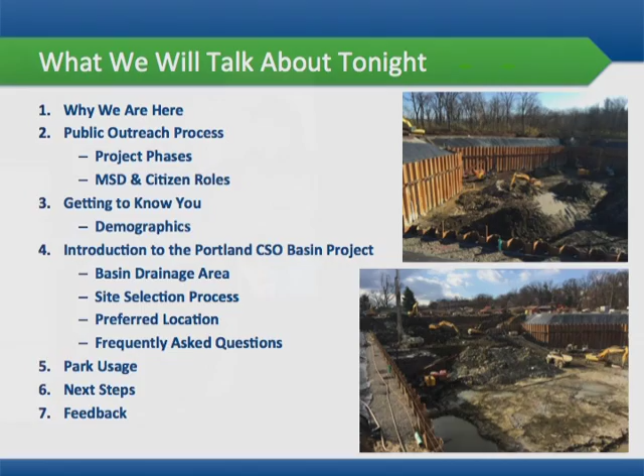You're here for a meeting called the Portland CSO Basin. Well, what is a CSO? If you look at this map, all those dots represent overflows in the combined or the separate sewer system. On dry weather days, sewage stays in the pipe system as it's supposed to and gets to one of the treatment plants in our metro area.

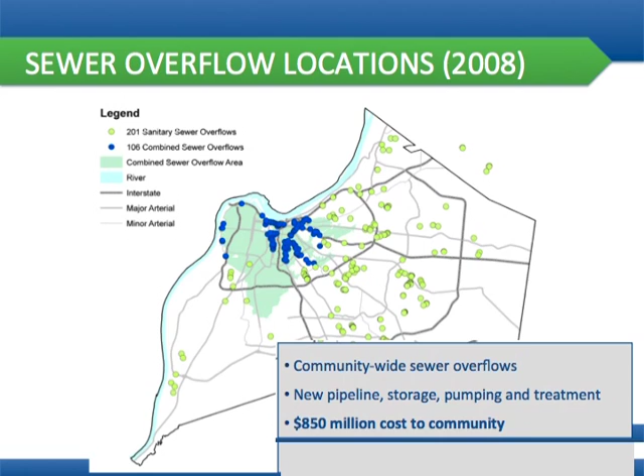However, when it rains, as we say at all of our conceptual meetings, with as little as one tenth of an inch of rain, we can have overflows in the system. The rain gets into the sewer system, and the sewage is not totally contained within the pipe system. It can't handle the rain and the sewage flow. So these show that these overflows are throughout the county.

We are mitigating this problem, we're addressing this problem. You've heard of the consent decree. It's an $850 million cost to the community, so we need to spend these dollars wisely and efficiently, and that's what we're going to explain tonight about this particular basin.

All you really need to take away from this slide is that all of the dots represent CSOs in the combined sewer area. That just means areas basically inside of Watterson where the sewer carries sewage during dry weather, and can carry storm water and sewage during wet weather.

So all those dots represent areas where water leaves the system. With as little as one tenth of an inch of rain, water can leave the system and not make it to the plant, but instead gets to a body of water, Beargrass Creek, the Ohio River.

Let's talk for a second about MSD's outreach program. We have a four-stage public outreach program, a public meeting process, starting with an orientation meeting where we first talk about the consent decree — why we're doing these projects, what the impetus is. We talk about the background of when the consent decree began, what problems we're trying to solve, and what we can do as individuals.

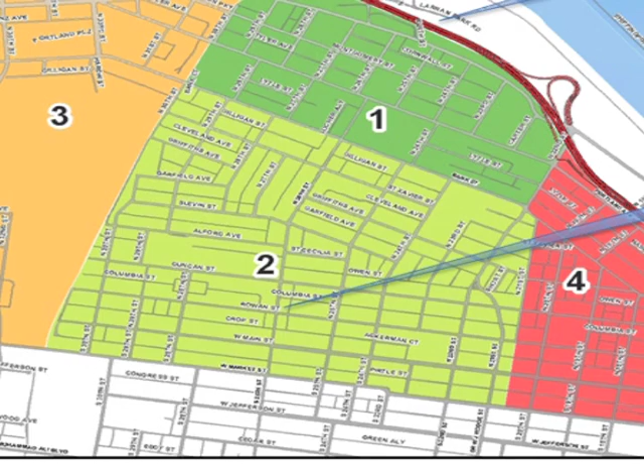Area 1 is bounded by 22nd Street, 30th Street, I-64, and Bank Street - that's the green area. Area 2 is 21st Street, 30th Street, Bank Street, and West Market Street - that's the lighter yellow, light green area. Area 3 is 30th Street, I-264, I-64, and West Market. Area 4 is 15th, 21st, I-64, and West Market.

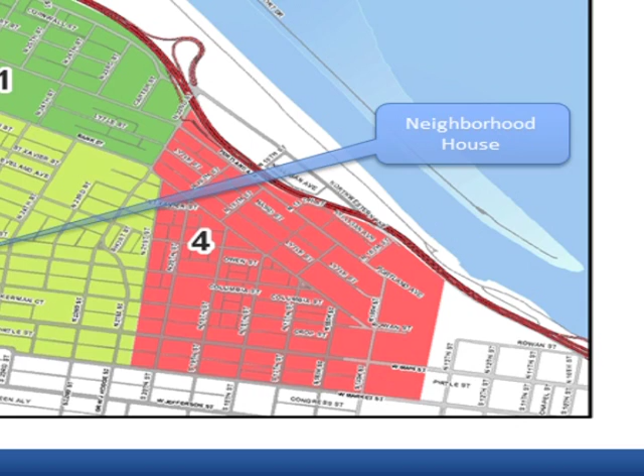If you're just close, I think that would be fine, so if you can identify that. All right, go ahead and use your clickers and identify which area you live in. If you don't live in one of those areas, click number 5. All right, a lot of people live in Area 1, good.

Where do you operate a business? Those are the same areas. If you don't operate a business, we'll have an option for that. You can see some of the major businesses here: Kroger, Portland Salvage Yard, Lannan Park, and Neighborhood House, where we're at tonight. Where do you operate a business - which one of those areas, or I don't operate a business? All right, I'm going to close the polling.

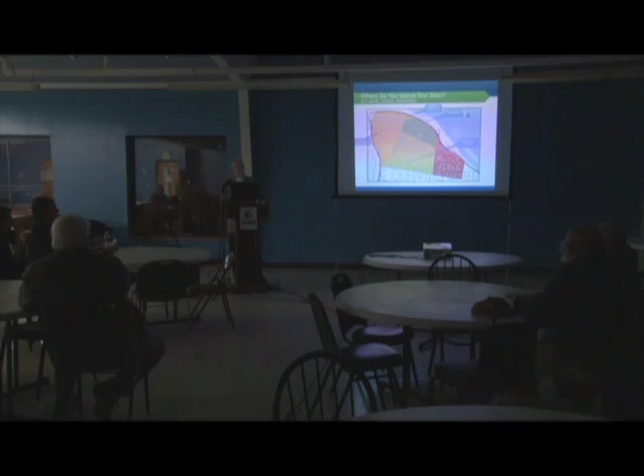All right, Area 1 again. Where do you spend your days? That's whether you work, go to school, or volunteer - just interested in where you spend your day. Do you spend it in one of these areas? All right, I'm going to close the polling.

All right, Area 1. We have a lot of people in Area 5, but we have a lot of visitors with us associated with the MSD, so I'm going to assume most people live in Area 1 then.

And what is a combined sewer overflow basin? It's a basin that provides temporary storage for wet weather overflows that would otherwise flow directly to creeks, streams, or rivers, and it's released back into the collection system for treatment when system capacity is available. I think we need to think about this as an empty basin when it's not raining. When it rains, it will fill up with storm water and some diluted sewage - it's not raw sewage in this basin. Once the sewer system has the capacity to take that water back into it, we'll pump that out.

Typically we are required to pump that out within 24 hours. So if we are in a dry period for a long time, there's just absolutely nothing in this basin. It's not meant to be operated 24 hours a day, 7 days a week, 365 days a year - it's a wet weather structure. And you can see on this schematic here, it's below ground. Above ground, if you were just looking at it, it's mostly grass or whatever we leave on top, but it would be buried and underground.

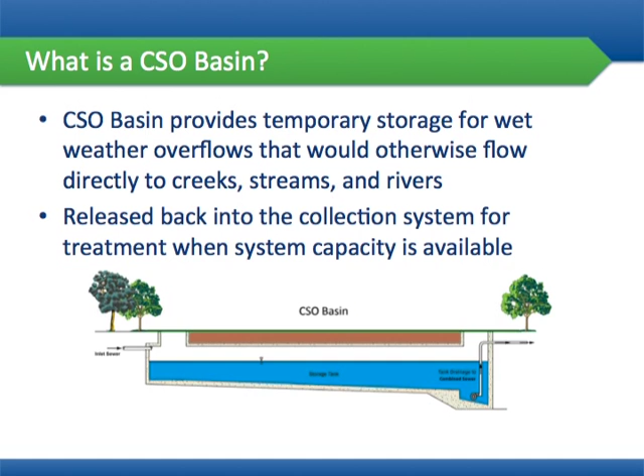This particular basin, talking about this evening, has a drainage area of over 850 acres. There are 61 overflows per typical year. That means on average, in our design year, which happens to be 2001, there would have been 61 overflows, equating to 167 million gallons of water and sewage that would have escaped the pipe system. With this basin, it has about 6.7 million gallons of capacity - it's underground and covered. Those overflows will be reduced, for the same rain events in that design year, from 61 down to 8 overflows per year. That's an 86% reduction in overflow occurrences.

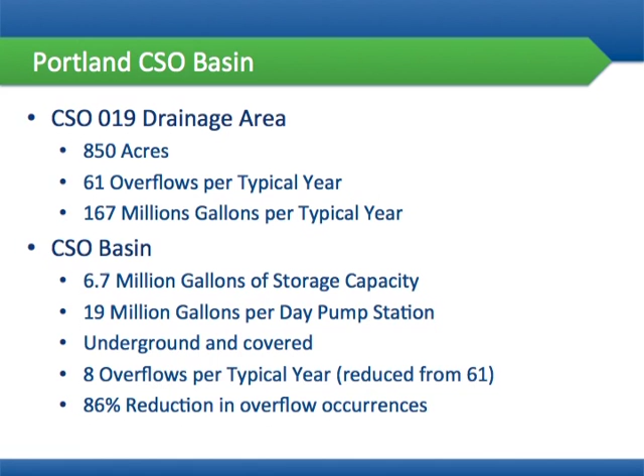Someone might say, why couldn't you take that to zero? Well, if you know the weather patterns, we design for a certain year, and then the next rain event could be larger than we've ever had. So we couldn't design it to the nth capacity - we design it to a typical design year. This represents that 800-plus acres, the 850 acres for the drainage area that would flow to CSO 19.

At this point, our design consultant for this basin is Heritage Engineering, and Bob Woosley, who happens to be a Portland boy, is going to come up and talk about this. Bob, if you come up - Bob's going to talk about the site selection process.

Thanks, Greg. As Greg mentioned, we did look at 12 sites. I think many of you are probably familiar with all 12 of these sites, and we'll go into those and explain why all of those were eliminated except one.

The general requirement is that it had to be hydraulically connected to that area that Greg showed you. It has to be within this red zone to collect the flow, because it all flows by gravity through the sewer system. It has to be able to get in there.

It also has to be a large enough area to accommodate an underground basin. When you're talking about storing almost 7 million gallons of liquid underground, you're talking about a significantly sized structure—in general, about a 150 foot by 200 foot box that's about 30 feet in depth underground. It could be rectangular, circular, whatever configuration, but that gives you a general scale of what's going to be under the ground.

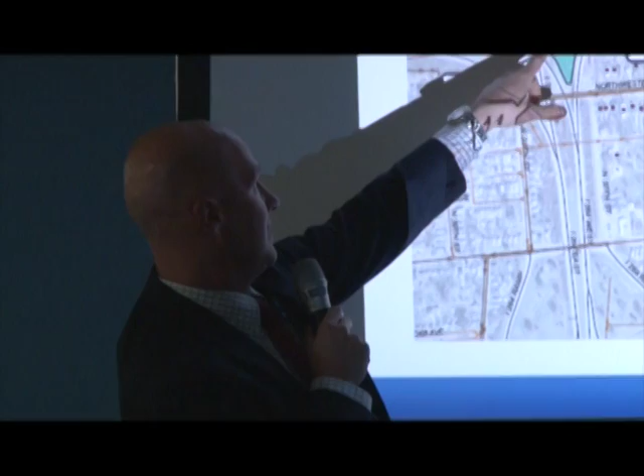And then a couple others sprinkled in here where we tried to get creative and asked, what about inside the right-of-way of I-64 and 264? Could you fit it in there? That got pushed back quickly by the State Transportation and Federal Transportation Cabinet—it would not be allowed.

But we wanted to look at all avenues, because the criteria we looked at for selecting these sites dealt with private property acquisition. We tried not to acquire private property if we had other avenues around that. Some of those sites, if you go back and look at them, would have required private property acquisition, which we did not want to get into if it was feasible to avoid.

Another thing we looked at in this area are the historical and archaeological impacts. They're pretty significant once you get within the neighborhood—you could be taking down historical structures, and get into archaeological concerns in Portland Wharf Park, because old city streets are still buried there, and there are things of archaeological significance. So we worked with a lot of agencies to try to figure out how we could avoid those impacts.

You also have ecological and environmental impacts. One of the sites considered was the Portland Salvage Yard, and of course there you've got a lot of concerns with that being a brownfield, among other concerns.

Traffic disruptions—what's it going to do to the neighborhood? What does it mean when you close an area down, because this construction is going to take a significant amount of time to complete. And then any permitting constraints that we would have.

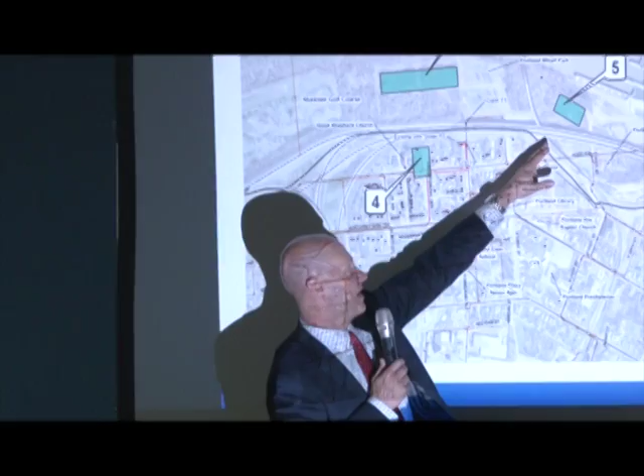The 4 we came down to were our original Portland Wharf site—and pay no attention to the size of the boxes, it was just a representation—the vacant tract next to Good Shepherd Church, a vacant tract across from the salvage yard, and then Lannan Park.

We looked at these 4 sites for the same reasons, went back through them and figured out what constraints we're dealing with on each. For example, on sites 1 and 5, both are located in a vacant area, but both are located on the river side of the flood wall. So one constraint we had to deal with was what happens when the river gets up and you have flooding and need to get to this facility or use it.

That was a major concern. Another concern was that in Area 1, the Portland Wharf site, there was the archaeological significance of that area, and we were trying to not disrupt that significance or diminish it in any way.

Site 4 had concerns too. Yes, it was on a vacant tract next to Good Shepherd Church, but we were going to have a major disruption to the neighborhood. We would have to close those streets for some period of time, build it out into the street, and at the end of the day, you've disrupted the use of that property in the future in terms of putting buildings on top of it. You could still use it for green space, but if the church wanted to expand or do some other things, it would have hurt their ability to do that.

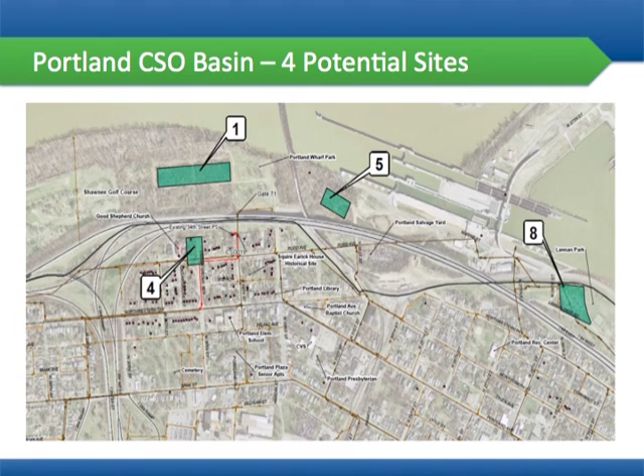And then the final site was Site 8, which was Lannan Park, and it too has some concerns and challenges. First of all, you have to keep the park open at all times, or our intention was to keep the park open at all times during construction. Keep access to McAlpin Lock and Dam and LG&E open at all times during construction, because there's an underpass at 27th Street, but they can't use that for their truck traffic - it's too low of an overhead. They have to go through the at-grade crossing, so they have to maintain access at all times to that, and that's the location of an old city dump. So what's underground and what are you going to get into? So those things all weighed into it.

So we went through that. We did a detailed site selection analysis of those 4, looking at many of the things that I just talked about. We looked at the permitting constraints, private property acquisition, and so on. And everything pointed to, at the end of this, we took the 4 sites down to the 1, which is Lannan Park.

Lannan Park creates its own set of challenges, as I mentioned, and as many of you know. But the location of the basin is going to go where the storage lot is today. So all of you are familiar with that park, I'm sure. As you come in off Northwestern, you enter the park, and as soon as you come in, you have to split to the left to go to McAlpin or LG&E, the hydroelectric plant, or continue on into the park.

We're putting it directly on the footprint of the storage area, so it fits - it's the perfect size, it fits perfectly underground. As Greg mentioned, when we finish this, it'll be under the ground. I mean, you will not see it. What we will have on the surface will be a small control building, because we have to put our controls and other materials inside of that, since while the flow gets into the basin by gravity, you have to pump it back out to get it into the system. So you will have that component in there, but beyond that, you will not see it.

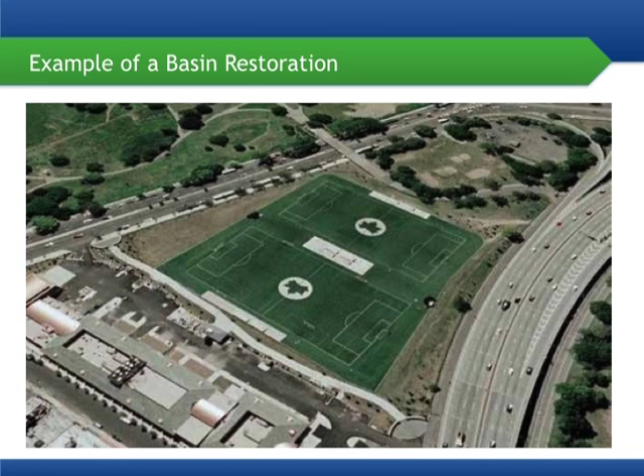I think it also kind of represents, by de facto, that a lot of people question things like odor. These are not storing raw sewage. They're storing highly diluted water during a rain event for a short period of time.

So, frequently asked questions: will this create potential for backups? No. The high water elevation in the basin will be below basement elevations. It will not eliminate the potential of backups, but it certainly will not be causing those.

What happens when the basin is full? The system will function as it does today, with overflows being discharged to the Ohio River. What we've said earlier is that we will contain that flow, and after the rain events, send the millions of gallons that normally would have been released to the Ohio River to treatment. But if the basin's full, it'll just function and overflow as it always did - not any worse condition.

Will this project reduce localized flooding? It'll increase the capacity of the combined sewer system during wet weather events, and to the extent that will mitigate some localized flooding, it will do that. But it's not designed as a local flood containment structure.

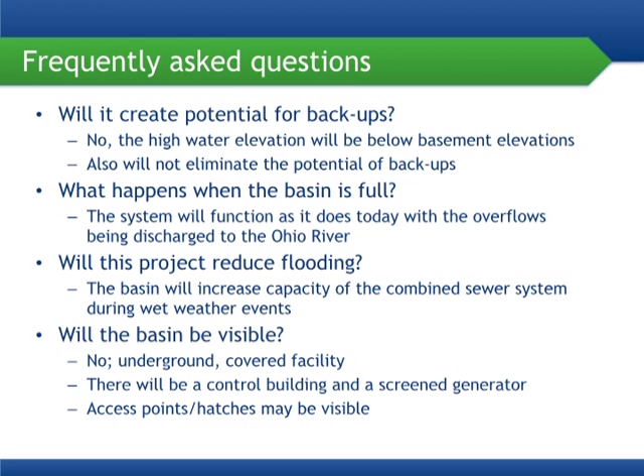Will the basin be visible? This will be underground. There will be a control building and a screened generator, and there may be some access points, since we have to have access to maintain the basin.

People always ask about odor. As I've said, it's highly diluted flow, mostly storm water. It is underground and covered. It's equipped with flushing equipment, so after the rain event, when we pump that water out, we will clean the floor of that basin, and that's all done automated - we don't have to have people out there doing this. Typically, odor control is not necessary with these types of facilities, but we are proactive. We will perform odor control monitoring and testing, and it's designed to accommodate a future odor control system if needed.

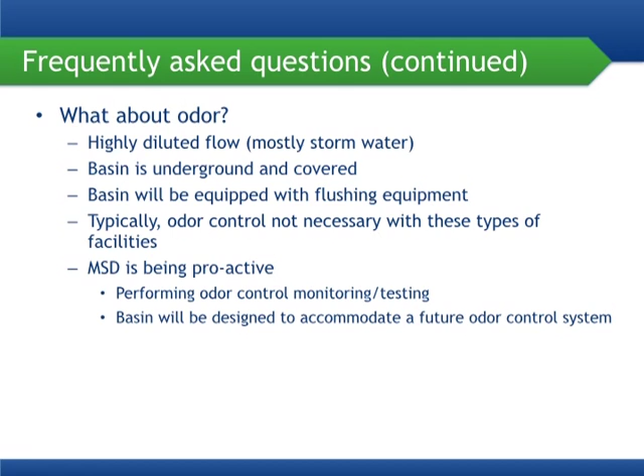So now we want to talk a little bit about park usage. Get your clickers back out and we'll get some input on that.

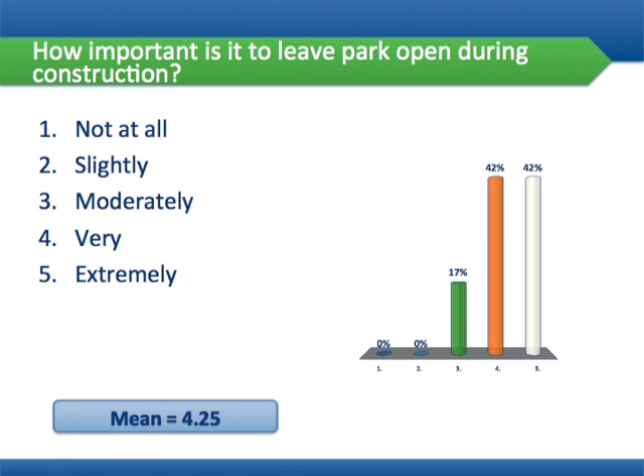How important is it to leave the park open during construction? Not at all, slightly, moderately, very, or extremely. All right, everybody voted? All right, pretty important. Again, I'm giving an overview.

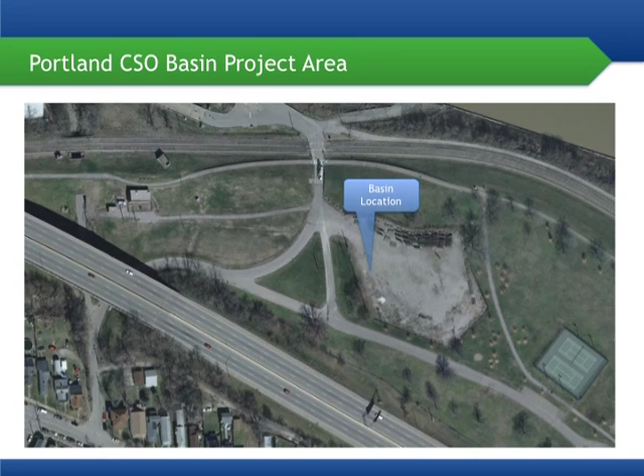Currently where the storage for bleachers is now, kind of a gravel paved area, that would be the location of the basin, and over on the left would be some of the access. What improvements would you like to see on this portion of the park? Back to here, where we're not talking about the whole park, but where the basin would be located and the entrance to the park. What improvements would you like to see in that particular portion?

Are there any public pools around that area? Marty, is there any public pools there? What's that? Any public pools in the area? There's no, are you talking about like a water feature, a spray ground, or a swimming pool? I'm talking about a swimming pool, since it's right next to the water, and we have aquatic deaths every year because we can't swim. We don't have a swimming pool in there, no.

Okay, is that one we want to add here? Is that your suggestion? Okay. Anything else? Anybody else have any ideas? All right, let's poll on that. Looks like most of us have voted. If you haven't, go ahead and vote for up to 3 here.